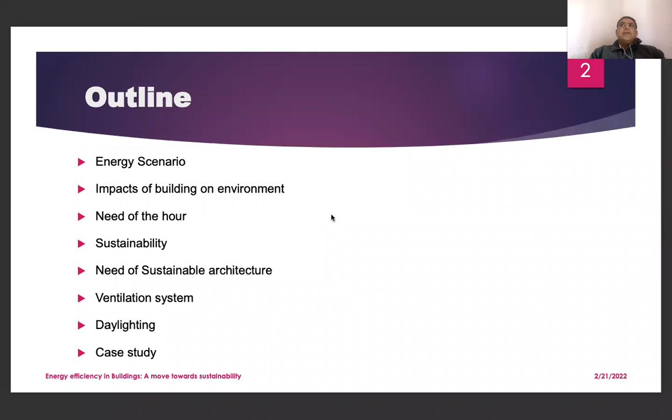So beginning with this, my presentation would be outlined as this: first we will discuss the energy scenario, then the impact of building on environment, need of the hour, what is sustainability, then how a sustainable architecture can be incorporated into a built space, and with the right ventilation and the right lighting, we can accommodate a sustainable building itself. And with an example or a case study, I would explain to you how things can be easily mended in the right way. And after that, I would be open for discussions with the participants.

So the present energy scenario, this is from the stats I've taken from BP Statistical Review of World Energy. And you can easily see it's a fairly progressive trend in the energy consumption throughout the years, beginning from 1965 till 2020, and it is still progressing further. And that means that we are going to consume energy at a very, very higher pace than it is presumed.

And of course, in 2020, this pandemic era was not incorporated, and during this pandemic era, we have spent a lot of time indoors, and that too having more recreations at our disposal. That means we were watching enormous TV, we were using all the online platforms to entertain us and to educate us, and we academicians were also having online classes. Students were having online classes. So in a nutshell, the energy requirement of a household has increased tremendously. And this data is just exempting that out of it. And in progressive years, it is supposed that it is going to increase globally.

And when we are talking about a building, if we have to understand how much energy is being consumed by a building as a whole, then this pie chart gives you a fair distribution of the energy that we produce. That energy is consumed in separate percentages in these broad sectors of the society, that is building, which is associated with 37% of consumption of the electricity, industrial, the second largest, that is 32%, transportation 22%, and agricultural, that is 2%.

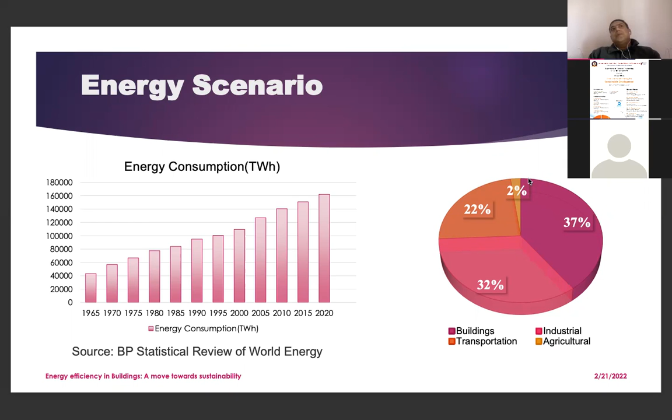So if we talk about the average annual change in the building energy consumption that is projected till 2040, for OECD member countries, these are countries which are predominantly pretty much developed, so their annual change of energy is not going to be a lot. But when we talk about non-OECD member countries, we can see that India is topping the list with 2.7%, not increase but prospected change in the pattern of energy usage.

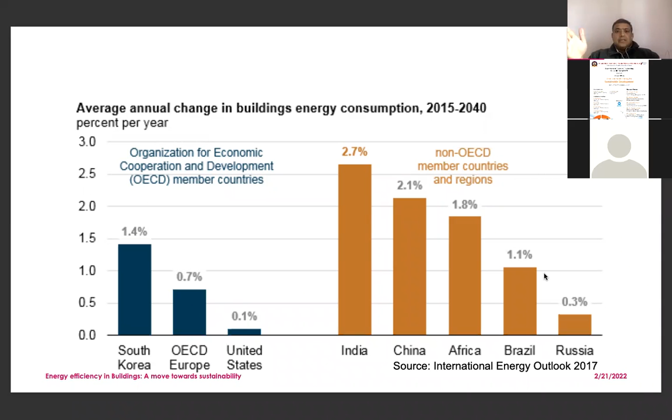So that means these are all those countries which nowadays are going to be increasing their development, and with that increase in development, the spending power of the citizens is also going to grow, and because of that they are going to get more products at their disposal, and they are going to use more electricity. That is as it is projected. Okay, so with this, we can see what is the building energy scenario of the country.

So the electrical usage in commercial buildings is basically divided into major factors, that is lighting and air conditioning. When we talk about commercial, these are your shopping malls, your various shops, your cinemas, theaters, your hospitals, including schools and colleges, etc. So predominantly we are talking about lighting and air conditioning, and air conditioning will also include the fans and all those things involved to create a mix of air to get a convenient and comfortable dwelling inside it, along with other stuff like pumping. That is the major distribution of electricity in a commercial building in India.

But when we talk about residential buildings, our houses, their distribution is like this: lighting is 28%, the fans and air conditioning, if they are there, account for 34 plus 7%.

Then cooling, evaporative cooling, refrigerator, television, and others are smaller electricity consuming sectors. So we can understand that out of whatever proportion of energy utilization we have in a house, in a built structure, whether commercial or residential, lighting and air conditioning, or lighting and establishing a comfortable dwelling condition inside a built envelope are the predominant consumers of energy, like 59% and 31% here in commercial buildings, and 28% and 34 plus 7, that is 41% for air circulation inside the built space to create a comfortable dwelling condition. These are the two main dominating factors here.

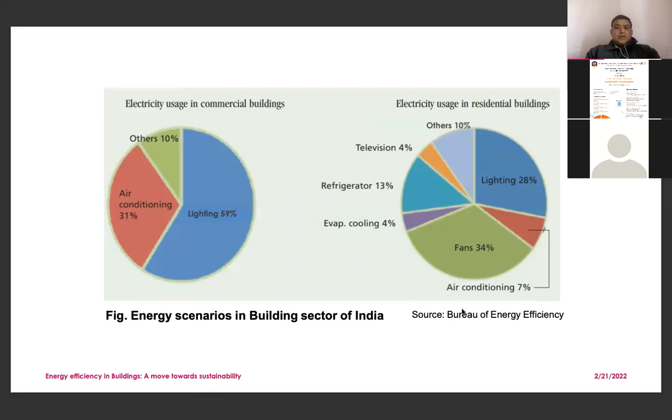So we'll be discussing more on this. The focus of my discussion is going to be on these two factors, that is lighting and ventilation. So coming to the scenario, this graph is from the India Energy Outlook 2021. We are using various devices at our residential places: lighting, fan, TV, refrigerator, washing machine, water heater, air conditioning, etc. are the devices which we commonly use, and how they are distributed in urban and rural areas is shown by the green and the blue bars.

Lighting is through and through, like 100% people are using lighting, and slightly less than 100% people are using fans in urban areas, and in rural areas, this percentage is using fans. It is a graph that shows what appliances are available in the various strata of society. And these yellow dots show the percentage share of energy efficient appliances. Like if I'm using a simple bulb, what is the percentage of people in urban and rural areas using energy efficient lighting? It's around 66% of people using energy efficient lighting, in total of rural and urban societies.

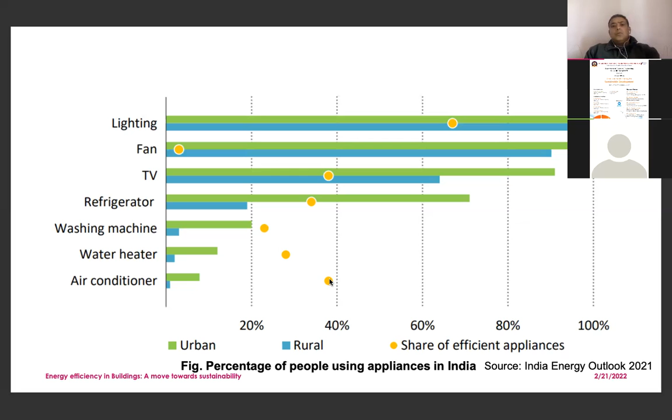And likewise, we all know that we are not using energy efficient fans. We just go for the easily available fans in the stores. Same about TVs, refrigerators, washing machines. We don't bother. Water heaters, we never bother. And air conditioners are awfully expensive, so we never consider getting an air conditioner which is inverter based, because it is going to cost you another 30 to 40,000 more than the respective tonnage. So we are not going to get that. So this is the distribution, and it simply says how things are scattered, what we are using, and what category it falls into.

Now, when we talk about sick building syndrome, in my research with my student, we have come to know that mostly people are not aware that the building in which they are living for a longer duration of time is giving them sick building syndrome. Mostly people don't know, whether in an official establishment or a residential establishment.

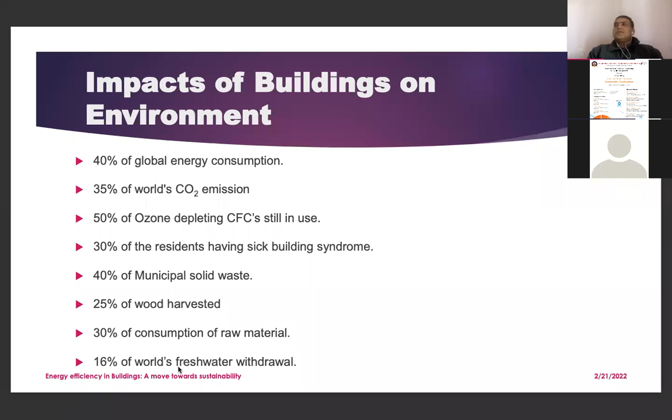Then buildings are contributing 40% of the municipal solid waste. 25% of the wood is harvested only for building utilization. 30% of the consumption of raw material is only for buildings, and 16% of the world's fresh water goes just to create buildings. So this data can be an eye opener for us, how a simple building, a home, is impacting the environment. Now, this is the need of the hour because of all the factors I have told you. We should understand how the building should be, and setting aside our personal interests, make a building that is appropriate for the time.

We should not create structures which are a burden for the society, the environment and our Mother Earth in all. So it's our responsibility as engineers also to consider this fact. That is why, in my opinion, this is the need of the hour, and we should understand and percolate this message as far as possible, to the farthest root level, so that from there we can have better growth and better infrastructure developed, which is more sustainable for the future.

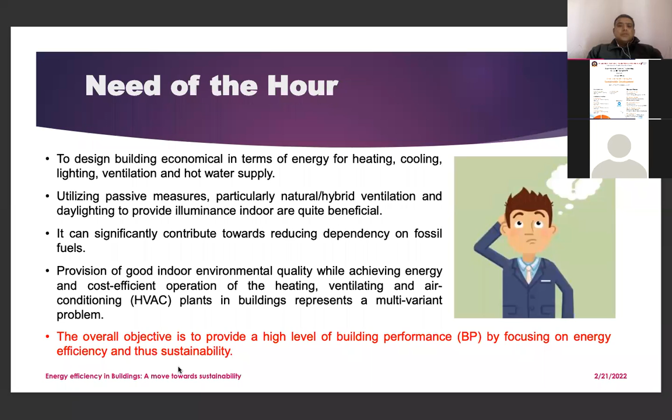So now the question arises: what is sustainability? We have been using this word for a long time, and sustainability is not only that we have to sacrifice our needs, but we have to mend our needs in such a way that we are accommodating ourselves and also caring for our future, so that they can accommodate themselves in that environment. So sustainability means meeting the needs of the present without compromising the ability of future generations to meet their own needs.

So this is a win-win situation for us and the future to come, or our kids who are just born, or 4, 5, 6, 7 or 10 years old at the max, because when they are going to be a part of the society and contributing to it, the environment and the society would be in a very bad shape. If we go on carrying out our activities at the same pace, things are going to be in a very bad shape.

Recently we had news that a very dominating, big country in the world was facing water scarcity. So these things are the future that is going to come. We have to be very vigilant about how we are consuming things and utilizing our resources. So sustainability means we are not compromising our present, but we have to think about the future and let them also live in peace with the environment.

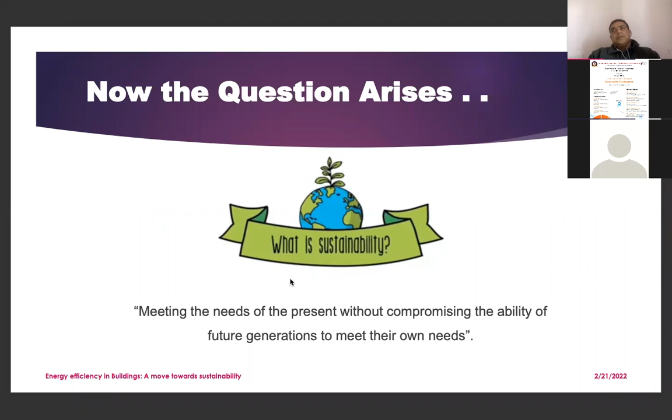So sustainability in terms of building, as my presentation is going to circle around that, would be the integration of environmental concerns in green construction. It is water conservation. It means waste reduction. It means energy efficiency. It means healthy structures. When we talk about sick building syndrome, we don't want much of that. So that accounts for healthy structures and the building's longevity also, because we don't want to create structures which last only 5-10 years, which are not economically viable.

So sustainability has a component of economic viability also. We have to think in total. It should not be that it's not economically viable and still we force it, and the person or the society is not ready to bear the cost of reconstructing it after 10 or 20 years. When we create a building, we create it for generations, and a generation is a minimum of 50 to 60 years.

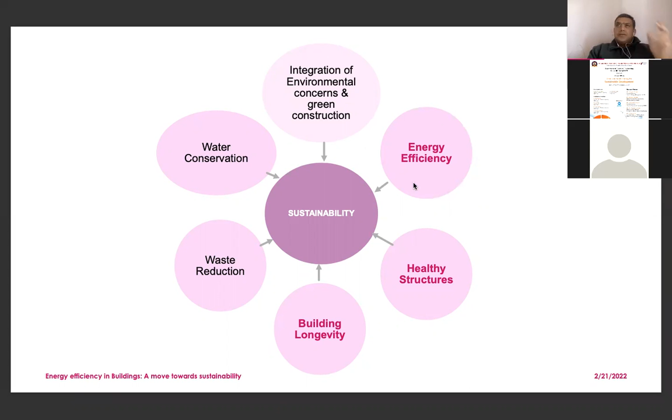So sustainability from the building point of view should encompass all these things, out of which we are going to focus on energy efficiency, healthy structures and building longevity. My dominating part would be on energy efficiency, which is going to be focused on two aspects, ventilation and lighting, for this presentation.

So in sustainable architecture, what has happened actually is that due to massive developments, the rural population has migrated to the urban sector, and we have created urban heat islands. That means the net energy demand of urban society has increased, because a major part of the population from rural India has traveled to urban areas because of the economic growth and the economic and professional attractions of urban society. So the crowd has increased towards the urban sector.

Due to that, there has been expansion of urban areas at the cost of depletion of natural resources. And when we are increasing the urban islands, we are simultaneously demanding more energy, because we need comfortable dwellings there. We need to establish comfortable conditions for the occupants to live peacefully and do their jobs in a convenient manner. So in turn, what is happening?

It is impacting the biodiversity, because we are replacing natural resources. We are abandoning those lands of the natural habitat that is there already. And suddenly the biodiversity is depleted and the entire ecosystem is in shambles. So we need to understand that we have to live amicably with the nature and not spoil everything.

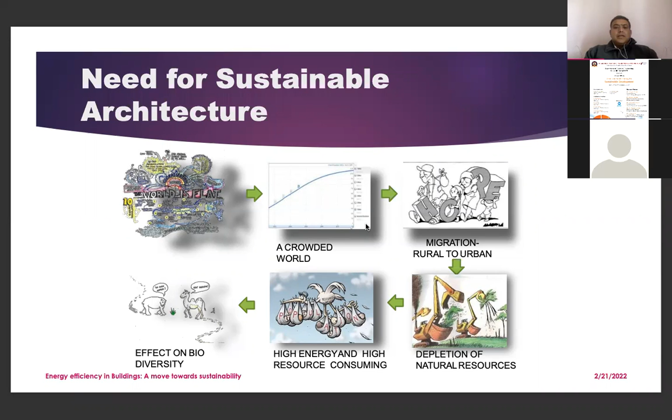We need to have a proper handshake between technology, architecture, and economic grounds, so that a perfect thing or a sustainable thing can be generated. So because of that, we divide our various activities of building into tier 0 to tier 4, that is site design, building design, passive systems, mechanical and renewable energy utilization.

So these three components are architecturally dominated components, which talk about what things need to be kept into consideration when the house is yet to be built. These two tiers, that is tier 3 and tier 4, will dominantly come into existence for all those activities which we are going to take care of once the house has been made, and now we need to make it more sustainable or more energy efficient in terms of what energy it is utilizing. Even though we can also incorporate these components while the new house is being developed.

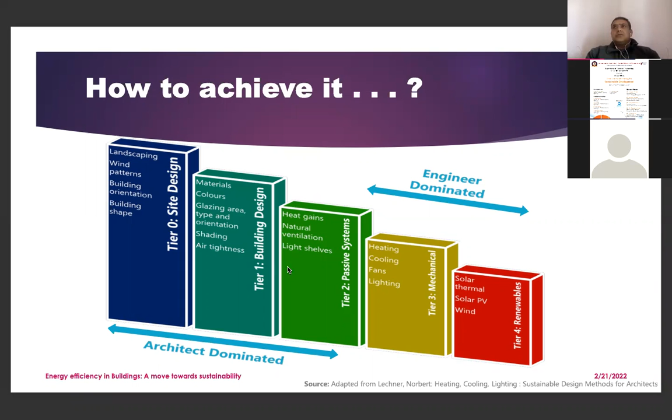So tier 0 is the site design, that is landscaping, wind patterns, and building orientation and building shape. So when we go to a site, we need to understand where the site is, what should be the orientation of the building, how the facade should be developed, so that maximum air can be brought inside the house, maximum lighting can be brought inside the house, so that we are utilizing natural ventilation and natural lighting the most, rather than depending more on mechanical devices.

If at all we have to depend on mechanical devices, then we have to search for options for renewable energy based systems, so that we are utilizing less electricity. In turn, we are going to generate less CO2 carbon footprint for the environment. This is the reality and the smallest formula that we have to adopt. So the basic components in the site design call for the landscaping, the wind patterns, and building orientation and shape.

So what I was saying is that building orientation and shape is important, that we should have maximum sunlight on the house. We should have the house oriented or made in such a way that maximum wind comes inside the house. We should study, and this is the responsibility of an architect, the wind patterns first while creating a house. There are other techniques also through which you can create diversions or hurdles in the wind pattern, so that a new pattern can be created and the wind can pass through the house or through the vicinity of the house. So this is all in tier 0, that is site design.

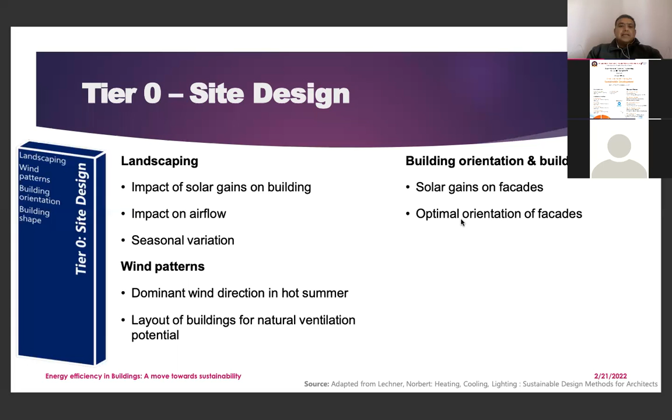In tier 1, that is building design, it calls for various insulations, finishes, then optimized window area, that is what should be the design of the window, how it should be placed, what should be the proportion of the opening on the wall, the proportion of the door on the wall, so that maximum air and sunlight can be brought inside the house. How the shadings have to be made.

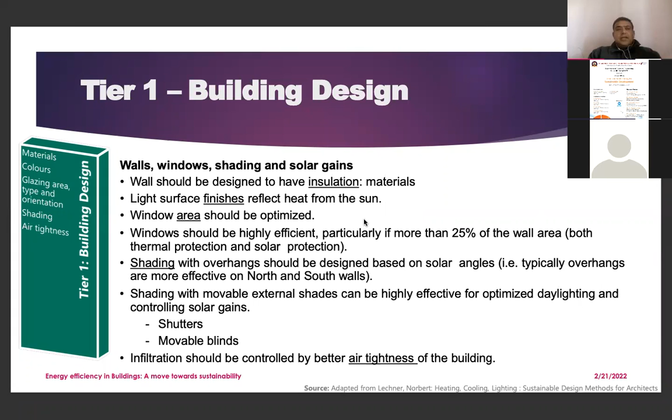And then what type of insulation materials can be used, which are beneficial for various climates, like summers, winters, and rainy seasons. How the glass panels should be mounted, whether they should be open glass or closed glass, single panel, double panel, movable or immovable. And there can be ventilation systems also installed, like ventilators, for air infiltration and air circulation inside the space.

Then the use of passive systems like passive cooling, passive heating, and passive lighting systems. When we talk about passive, that means we're utilizing more of natural, nature-based things rather than energy-based things that are mechanical or electrical in nature.

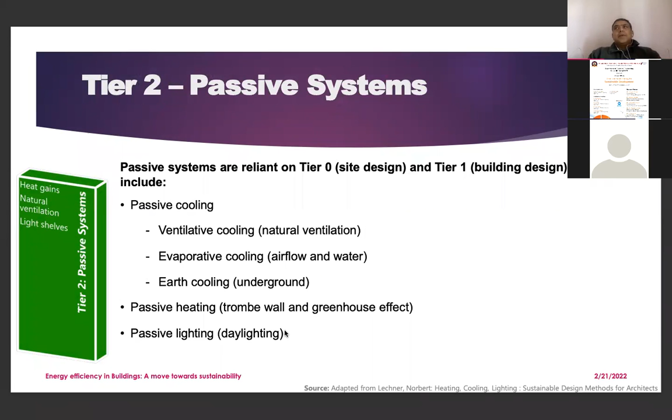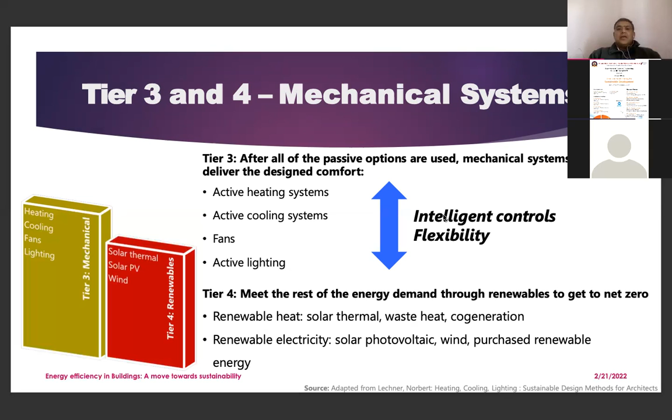Then comes tier 3 and tier 4, that is mechanical and renewable systems, in which we are using mechanical systems for active heating, cooling, fans, and lighting. But in this case, we prefer that they are intelligent, in a way that we are controlling the amount of energy or electricity they are using by controlling the way they are working. And if this is not achievable, then we need to fit renewable energy systems, which are also intelligent in nature, so that they can be utilized as and when the need is there.

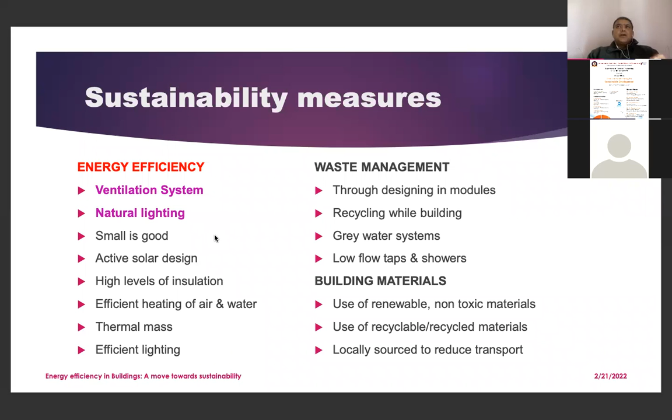Now, sustainability measures for a building, as I've told you already with the last diagram, fall predominantly into three factors: energy efficiency, waste management, and building materials, which holistically counter sick building syndrome. For this presentation, I'm focusing only on the ventilation system and natural lighting, which contribute to the energy efficiency of the building and create a comfortable dwelling inside the building space.

Now, ventilation is basically an exchange of air within and outside the building, so that fresh air can be taken in every time. We all know that hot air rises up and cool air, or the breeze, is coming inside. In the older houses, we used to have windows along with ventilators, and those ventilators were always open so that the air could be circulated.

But nowadays, in present construction, the ventilators have gone because we have air conditioners in the room, and mostly they are on, so the circulation of air is done mechanically. But this has been proven to be not a very good approach, because we are using energy to do that when we can do it without an active system installed in the room.

So ventilation works like air flowing from interior to exterior, thus it's necessary to maintain air. We need to just create an opening so that the airflow can be managed inside out and the air is always circulated. This is called air exchange. The more air exchange there is, the better, because there is more fresh air inside the room.

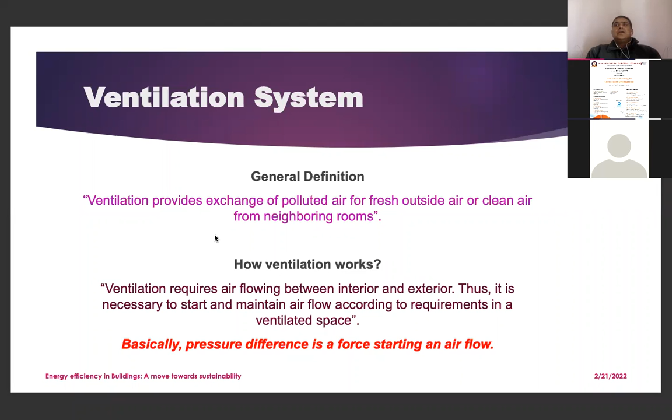Of course, we need to keep in consideration that if there is a polluted space outside, only in that case do we need mechanical devices to get clean air inside and manage that. Otherwise, if the pollution level is not to that extent, then as far as possible a natural ventilation system should be installed. The air circulation happens due to the difference of pressure within and outside the building. This is called air exchange.

So this is standard data: an adult has a breathing frequency of about 16 breaths per minute, or 8 liters of air per minute we are taking in and bringing out. The oxygen consumption varies between 250 to 350 ml per minute. Then the pollutants that we have.

Now when we talk about pollutants, it's not only the pollution coming from outside into our houses. It is also all those volatile things inside our houses, like the polishes on the furniture, the dyes used on our fabrics like couch cloths and curtains, and also the paints. If they are not lead free, they emit lead for a long duration, which we are inhaling. These all contribute to pollution. Even if the outside is not that polluted, the inside is already polluted if you have such things in your room.

So the best, easiest measure is to create an active air exchange, and that can only be done by having good openings in the building so that the air can be circulated. Then we are always exhaling carbon dioxide, so that is one pollutant already there. Then there are the various equipment, furniture, flooring, volatile organic compounds. Then whatever technology we are using; nowadays we are habitual of having TVs in our bedrooms, and there are like 4 or 5 TVs in a household with 4 or 5 rooms.

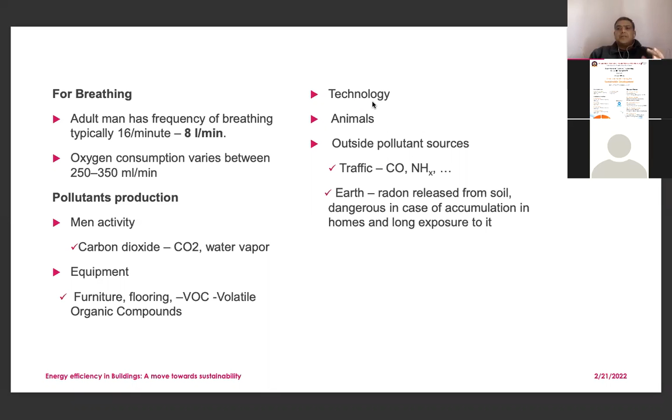There are other pollutants coming from outside into your building, like from traffic, or if you have a bakery in your vicinity. Whenever they're baking their stuff, the emissions come inside your house. There are many such things because we are part of society, contributing to indoor pollution.

Ventilation is of various types: natural ventilation, mechanical ventilation, and hybrid ventilation. Natural ventilation is a natural pressure drop between the inside and outside environment, so whatever air is exchanged through the external source is due to natural ventilation. If we use a device for this, it's mechanical ventilation. Hybrid ventilation is an amalgamation of natural and mechanical ventilation.

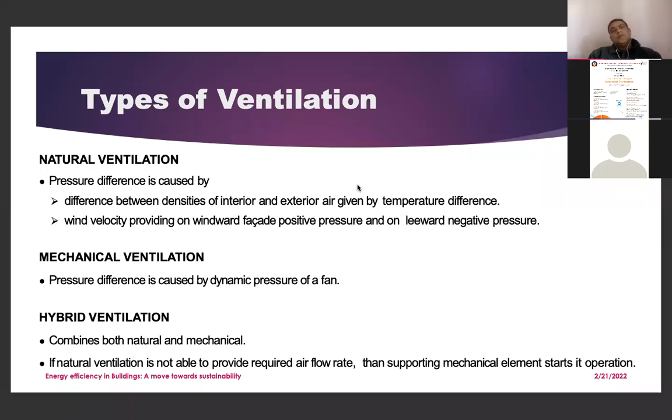It keeps a tap on how much exchange has been done through natural means. If it is not adequate, mechanical means will be switched on and the work will be done, and after that it will be switched off and put back to natural ventilation mode.

This is also influenced by how societies are created, which contributes to the landscaping aspect. We create societies rather absurdly - in some sections, houses are placed very closely together, and because of that you cannot feel any high-speed wind on your face, even though there can be a windy situation in an open ground.

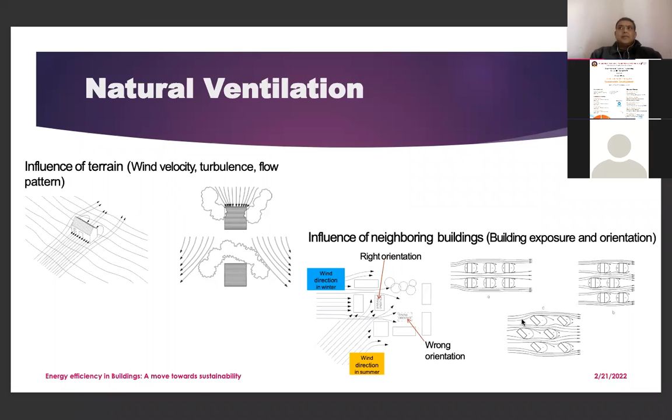This typically happens due to the malconstruction of houses, which does not allow the wind to come into the premises of the household. So landscaping of a society is very important - abnormal constructions or malconstruction should be avoided.

This is how natural ventilation occurs - fresh air, which is cooler in temperature, comes in and hot air goes out. Shaft ventilation can also be utilized for this, in which wind is selectively percolated to every room of the house and then taken out.

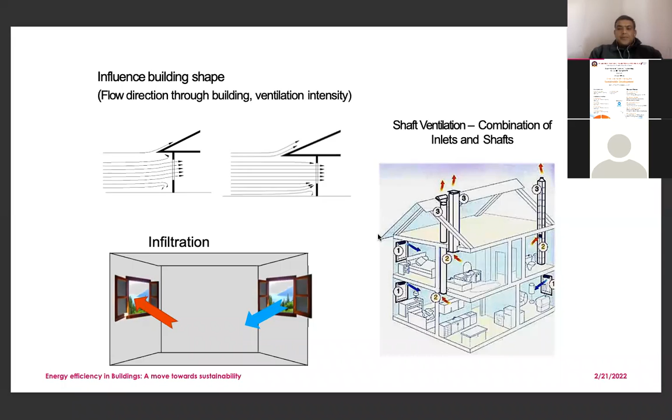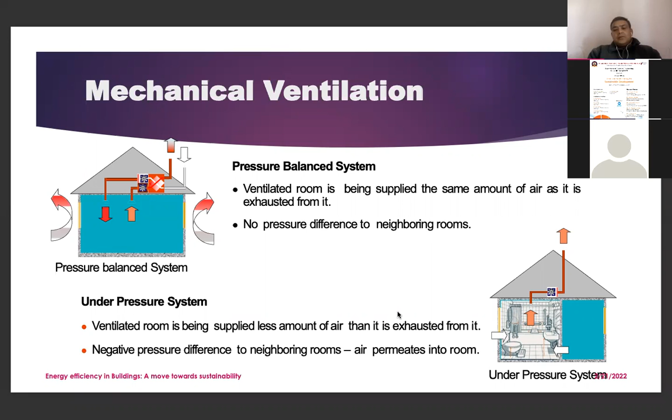This washroom is an under-pressure room with a negative pressure difference - less air should come inside the room and more air should go outside, exhausted from the room. So this is a negative pressure or under-pressure system.

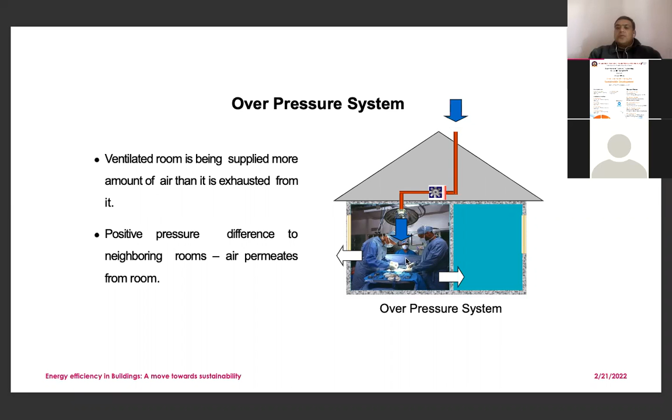An overpressure system is like an operation theater, shown here. It's a positive pressure room in which air permeates from the room - more air should come inside and less should go outside, because we don't want an active exchange, as it would call for more viruses or bacteria coming inside and infecting the sanctity or sanitization of that space. So this is an overpressure room. We already have such ventilation systems working for us.

A hybrid system is like a naturally ventilated room, but whenever required, the air handling units are there to manage the flow properly so that the entire room is properly ventilated. So these are the hybrid systems which have both natural and mechanical ventilation.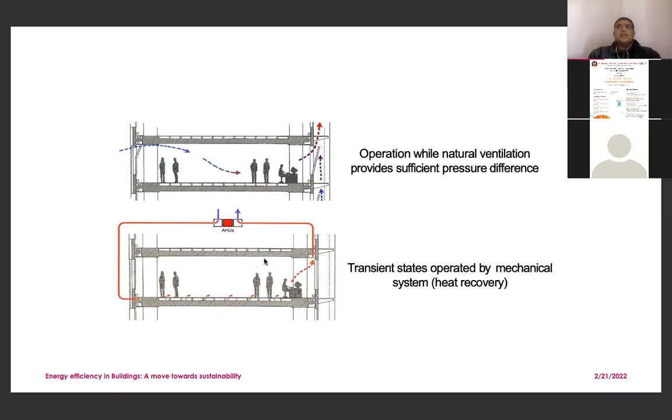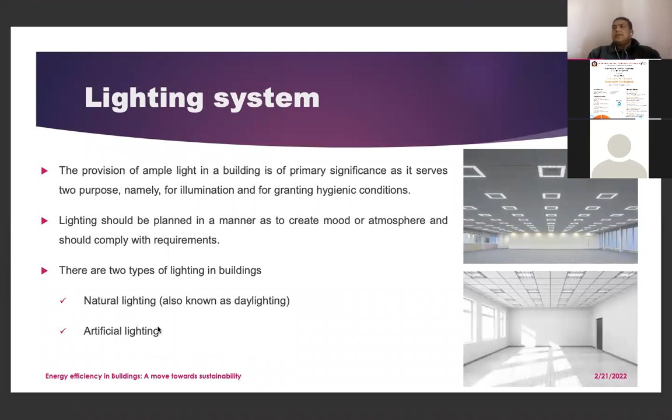When we talk about lighting systems, there are predominantly two types: natural lighting and artificial lighting. Natural lighting is solar light, sun radiations that are actively there for us, while artificial lights we create for ourselves, and we are habitual of using artificial lighting the most.

Now, to see how artificial lighting and solar lighting differ, there are prominently four types of lights: incandescent, CFL, metal halide, and high pressure sodium. Incandescent and fluorescent are mostly used in households, while metal halide and high pressure sodium are used in stadiums and street lights. Lumens, wattage, and their respective efficacies are shown here.

For incandescent light, the bulb we used to have, the white section shows the lighting area and the yellow section shows how much heat it is producing. That bulb was producing only 7% light, while the heat generated was 93%. For fluorescent, it's 22% light and 78% heat, which is still too much.

For metal halide, it is a 30% to 70% proportion. High pressure sodium is 35% to 65%. But talking about sunlight through a clear glass, it is 60% light and 40% heat, so this is of more benefit to us.

If we can utilize sunlight to the most for the entire day, it should always be preferred, and a medium should be made so that we utilize more sunlight, because sun radiation has more light spectrum. So the illumination of the room would be more compared to mechanical or artificial sources of light. Also, this case might generate some glare.

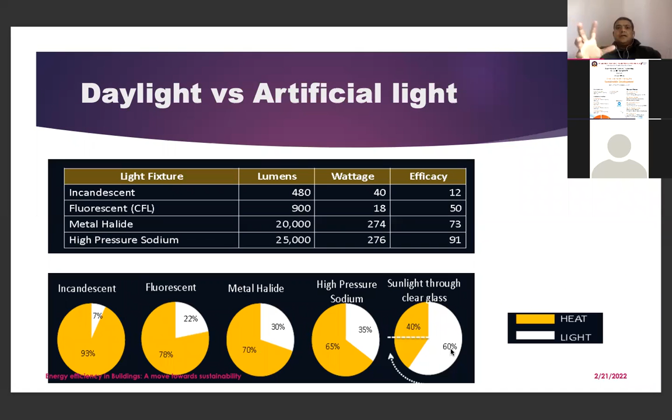In that way, adequate illumination can be brought inside, and a good proportion of energy can be utilized. So these are the various benefits of using a good daylighting option: it enhances quality of sleep, reduces stress levels, strengthens the immune system, improves learning capability, enhances productivity, and boosts psychological development.

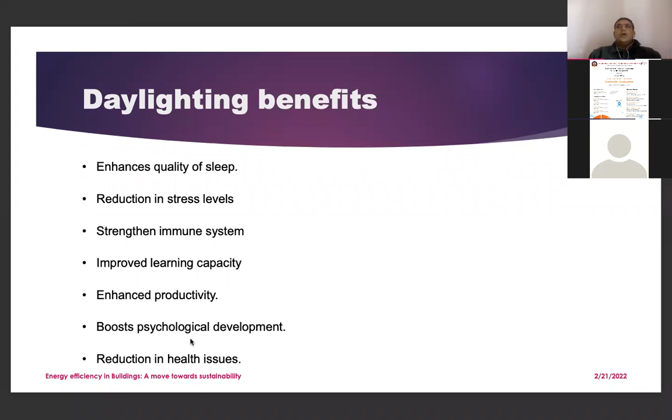This is one of the most important things, that stress levels are reducing and psychological development is happening, along with reduction of health issues. This also contributes to lessening solar radiation when it comes more into the household, and contributes to lessening sick building syndrome to a larger extent, along with a good ventilation system.

Now a lot has been talked about it. So coming to a small case study that we have done on our university campus itself. This is our university, maximized here. I hope this is visible to you all.

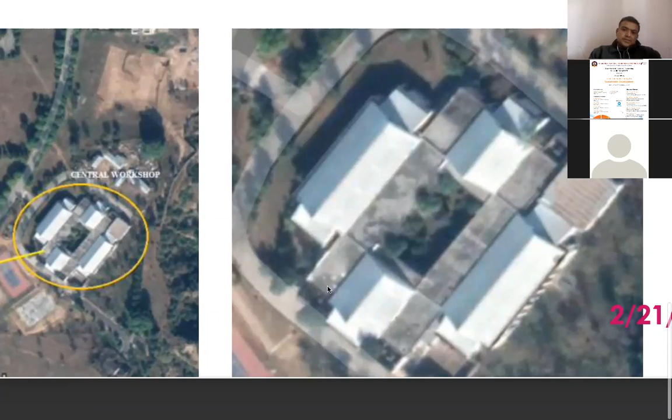If you see this figure, this is our central courtyard, the distribution of the university, and this is our central workshop. In this space, this is the maximized view of it, and this zone is what was modeled in this experiment.

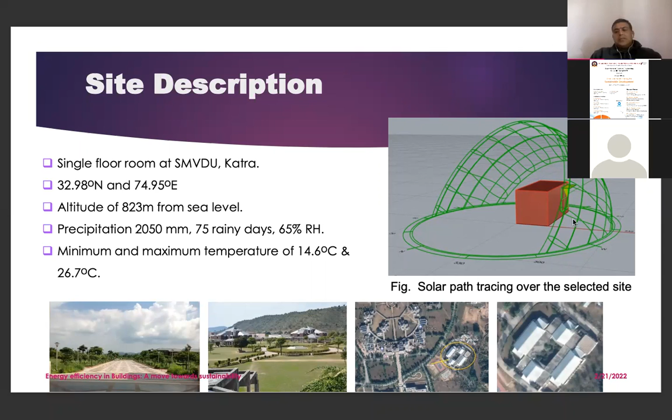So this room that I've shown, what you are visualizing here, has been modeled, and this is the solar path tracing of this room, showing how the sun is going to pass over it. We have done this modeling using Rhinoceros and Grasshopper plugins.

So this is the model of that room, which has retrofit fittings like shaded areas as shown here, because it's also having a connected room at the backside. On the front there is also some shading. There's a bigger window here, and a longer slit along with the door, which we have considered closed. So the entire light penetrating inside the room is from this big window and the slit of the structure.

So when we have done the lumens analysis of this structure, since it's an office space, we have done it from 9 AM to 5 PM in the evening for a particular day.

So this is a particular day in June because we have the maximum sunlight on that day. This shows the illumination inside the room, over the plane at the center of the room, when light is falling in from this slit. This image is from the top view, showing the bigger square window on this side, and a longer, smaller slit.

This is the image at 9 a.m., where the illumination is more than 2000 lux. That's a huge amount of light coming into the room, which is not desirable at all because it causes more glare. In an office space, there are tables with ceramic finishes and other polished structures, so light reflects from all the surfaces, making it an inconvenient sitting space for the occupant. This is the pattern of lighting throughout the day: at 9 a.m., 11 a.m., 1 p.m., 3 p.m., and 5 p.m. in the evening.

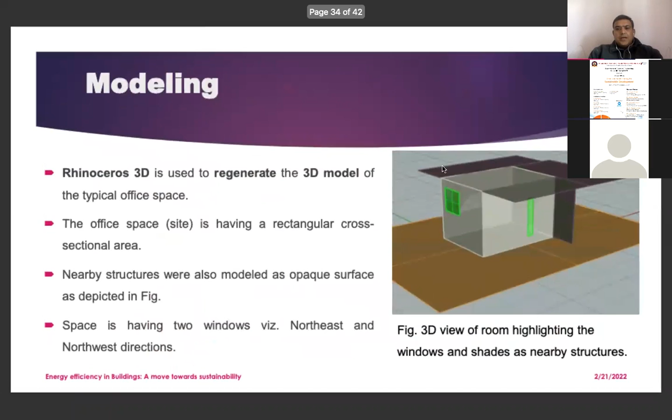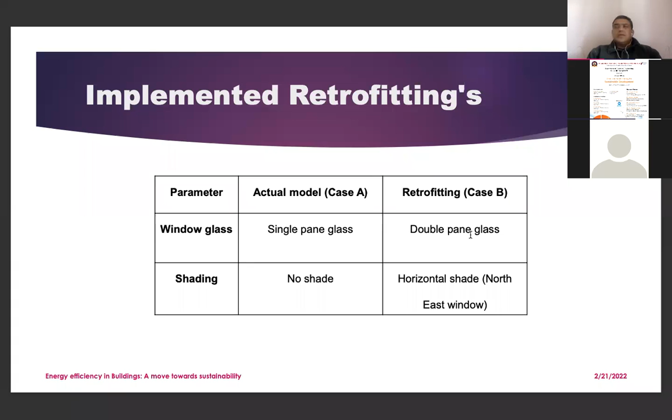So what we did was plan for some retrofittings. We created a shade, and we also tried to replace the single pane glass with a double pane glass. Due to this retrofitting, the changes in the illumination pattern for the same space are like what is shown here.

Now you can see the ingress of daylight inside the room has reduced to an acceptable level, above 200, and at very few states it's more than 2000 lux, which is the acceptable range as per the ECBC. Now the entire room has apt illumination, with certain regions where we are going to use some artificial lighting.

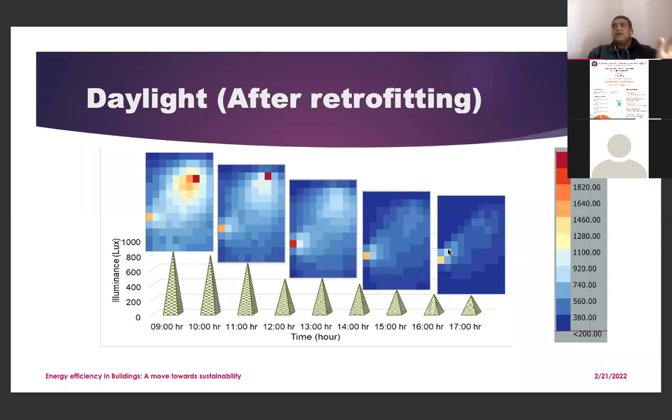So the net energy consumption of this occupant space has been reduced from 2543.4 to 2303.4. This is a very small change for a single room, but when we talk about the entire campus, it contributes a lot, because this change is going to be recursive in nature.

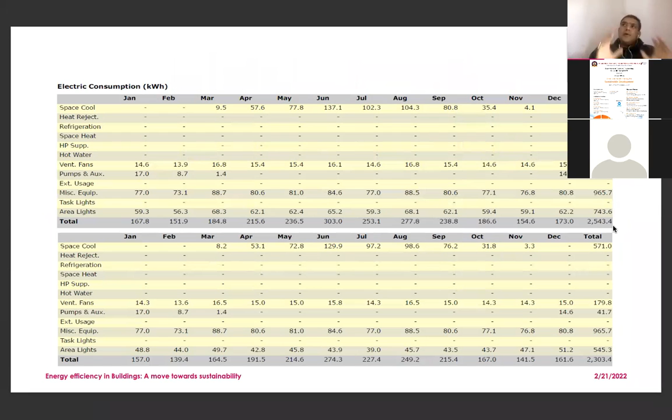This change I'm showing you is for one day. The energy consumption I'm showing you next is for one year, and this is for only one small space. If this type of activity is carried out for the entire space or a bigger building, these small changes will add up and create a bigger difference.

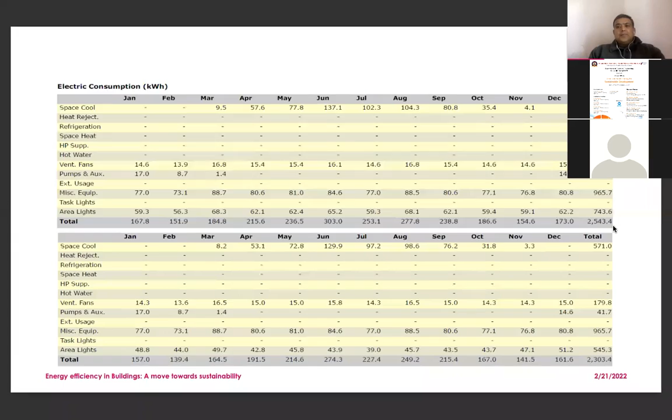This is why it's important to understand that if proper ventilation and proper lighting are done, we will always tend to use lesser energy and utilize our resources to the best.

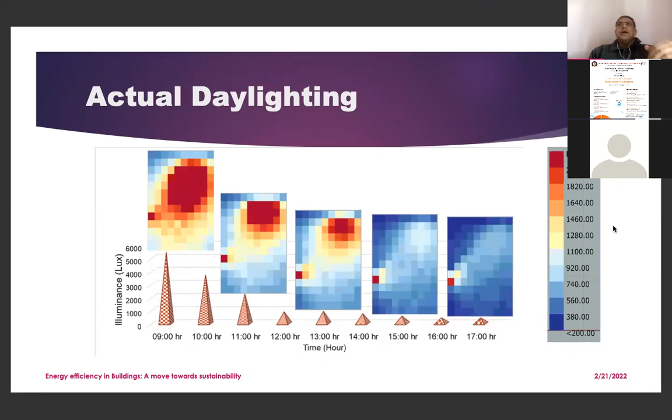This also calls for one more thing: in tier 0 to tier 4, tier 0, 1, and 2 are from the architect's point of view, and tier 3 and 4 are from the engineer's point of view, preferably mechanical and electronics engineers, because we're talking about intelligent systems and mechanical cycles. Nowadays we have software capable enough to give us an idea of how things are going to work for us in the longer duration of time.

So in my opinion, there should be a medium of understanding between the architects and the engineers.

It's time that these people should come together, sit together, create buildings which are more sustainable in nature, utilize softwares to their capability so that they can provide very good, well captured information to the stakeholders, that is the owners of the buildings. It's not their fault, because they don't understand these things. They don't know these things.

So if we give them a pictorial representation well in advance, first hand, that these things are going to affect your net building quality or your occupant quality or your comfortable dwelling conditions in this manner, then these incorporations can be done in a building and a sustainable society can be developed.